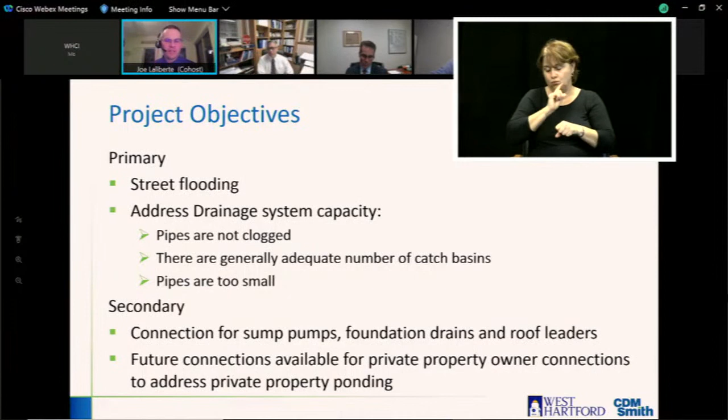Next slide, Cindy. So stormwater flooding, what is causing it? Well, West Hartford is an urbanized area with high impervious area. So let's break that down a little bit. Urbanized area means that there are a lot of houses. It's very well developed. When West Hartford first started, it wasn't as developed. There were fewer houses, and as West Hartford grew to the size it is today, more houses filled in the area, and as a result, it created more impervious area.

So what is impervious area? Impervious area is where water that falls from the sky cannot permeate into the ground. So surfaces like pavement, the streets, your roof, your driveway, things like that are called impervious area. When there's a high amount of it, there's nowhere for the water to be able to percolate into the ground in areas such as grass. So because of this highly urbanized and highly impervious area, it creates more stormwater.

We also have had more frequent and high intensity rain events. I don't think I need to explain any of that to anybody on the call. In the last 4 months, we've had 4 major storms, one of which was over a 200-year storm. The definition of a 200-year storm is a storm that is supposed to only occur once every 200 years. Unfortunately, these storms have been happening at a more frequent pace lately. And so that's another reason causing this stormwater flooding.

Another reason is high groundwater. The town is generally in an area with high groundwater. Trout Brook runs right through much of the drainage area that we studied, and all of the homes around the area have high groundwater. So even in the areas where you do have grass and the water could permeate into the ground, because the groundwater is so high, there's nowhere for it to go. And lastly, we have poor draining soils, a lot of clays and things like that, which don't allow the stormwater to percolate down into the ground.

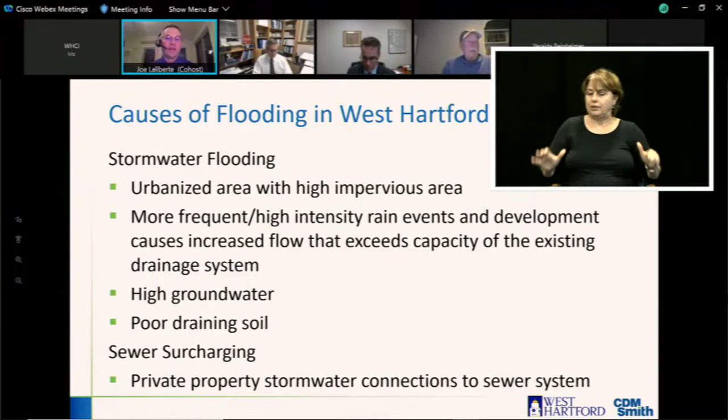And so the sewer system was sized to convey your sanitary sewer and not these private inflow connections. As a result, they overwhelm the sewer system and cause it to surcharge, which is a separate type of flooding, typically what you would see as the flooding in your basement. Next slide, Cindy.

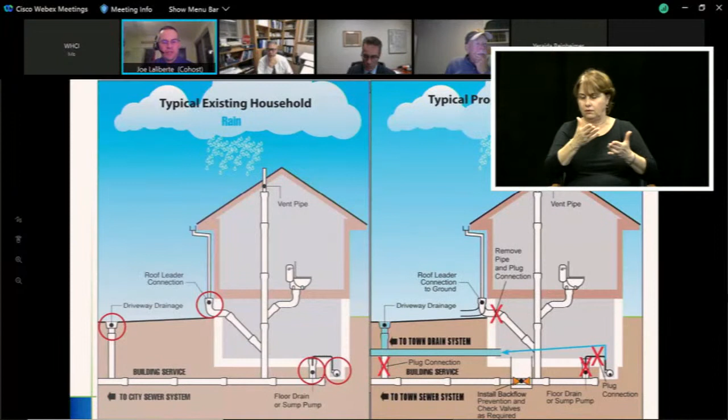So this schematic gives you an idea of a typical household. On the left-hand side, you have what typically would go into a sanitary sewer service: your toilet, your shower, your sink, the dishwasher, the washing machine. All of those things belong in the sanitary sewer service. But what also is in many of the homes in West Hartford is there are roof leaders that are connected over to the sanitary sewer.

There are sump pumps and foundation drains, which is in the bottom right corner, also connected to the sanitary sewer. Unfortunately, when these houses were built back in, say, the early 1900s to the mid 1900s, it was common for the houses to be built that way. So that's how many of them were done. But nowadays, we realize that these connections should have been in the drain and not the sewer system.

The reason they were put in the sewer system at the time is because they can flow by gravity. The sewer pipe in the street is deeper than the drainage pipe in the street. Typically, sewer pipes are 8 to 12 feet deep in the street, whereas the drainage pipes are usually only, say, 3 to 5 feet deep. So if you have a foundation drain underneath your basement that's collecting that high groundwater, it would flow by gravity to the sewer, but would not be able to flow by gravity to the drainage system.

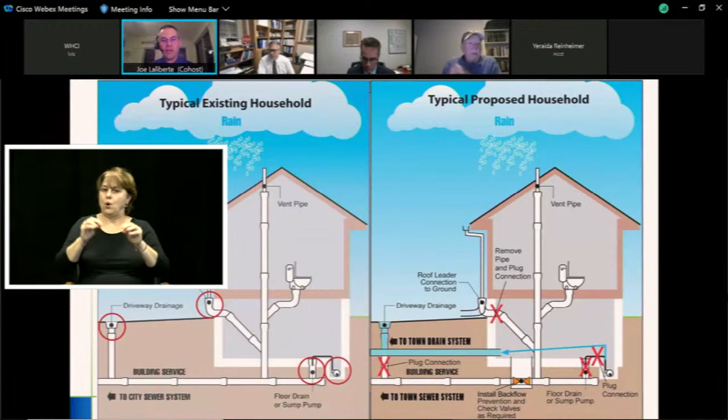So often what you would need to do is put in a sump pump that would pump the groundwater up to the higher elevation where the drainage system is, which is the graphic shown on the right-hand side. So what we're talking about moving forward is to keep the sanitary sewer in the sanitary sewer and remove these private inflow connections, the roof leaders, the foundation drains, and the sump pumps, and connect them over to a properly sized drainage system that would be increased in capacity to take this additional flow, with service laterals at the property line.

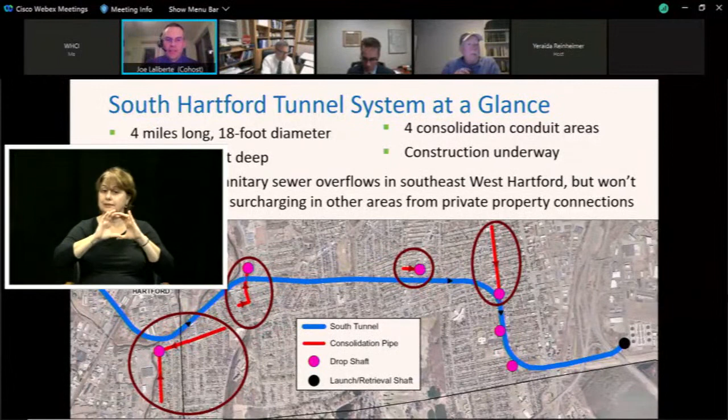Next thing I wanted to do was give you a quick overview of the fascinating South Hartford Tunnel project. The South Hartford Tunnel is a drainage and combined sewer tunnel that runs, on the right side of the graphic, along the east and southeast side of Hartford. The black circle is located at the Hartford wastewater treatment plant. The blue line that goes from the right side of the graphic over to the left side is the South Hartford Conveyance and Storage Tunnel.

That tunnel is 18 feet in diameter, and it's 175 to 250 feet below the ground. We have been working on that tunnel for a couple years now. We started on the far right-hand side of this graphic. We've crossed the West Hartford line, which is on the left side of this graphic. We have about 2,000 feet left to go before we hit the black circle, which is where we come out. We think that we will get there by the end of next month. That's where we're hopeful.

However, this project has a lot of other things that need to happen in order for it to be active. The circled area is all of the consolidation pipes that take flow from West Hartford and bring it to the tunnel. And the pink circles that you see are called drop shafts. That's where the flow from the surface would drop down 200 feet and connect over to the tunnel. Construction is underway on all of these projects, but it's probably another couple years away.

One of the questions that we have gotten is, will that tunnel address all of the sewer surcharging that's happening in my property, say in the center of town, which is where our study area was? The tunnel was sized to take the surcharging down in the southeast corner of West Hartford, where there are actual outfall pipes that discharge combined sanitary sewer flow and stormwater flow to receiving water bodies. So we're looking to connect those up.

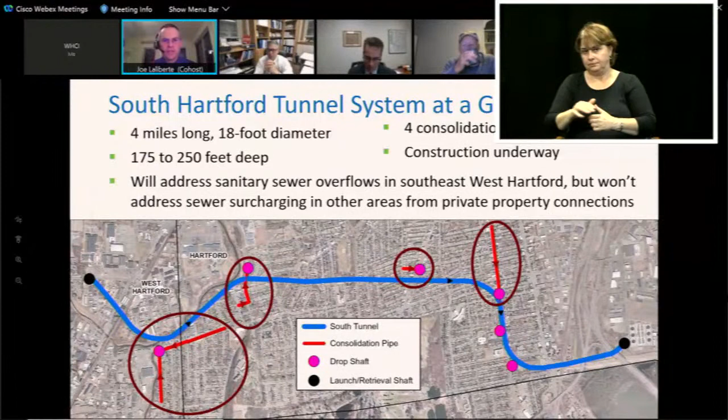So just quick project timeline. 3 studies were mentioned to you. So the first one was done by another consultant engineering firm. It was completed in 2018. And that study was to look at the drainage culverts on Trout Brook. So there are drainage culverts along Trout Brook that are undersized that are causing some flooding associated with them along Trout Brook. And so that study made recommendations, and there are recommendations in the report to upsize those culverts, which you'll hear more about from Cindy a little bit later.

The second study was from CDM Smith, the phase 1 drainage area. And I have a map on the next slide that will show you where the phase 1 versus phase 2 is. But that drainage study was completed by CDM Smith in June of 2020. It was presented to the town council in October of 2020. We had public information meetings November 23rd and 30th for the two different areas within the study area. We did submit a grant application in January of 2021, and as Mr. Martin has mentioned, MDC coordination has been ongoing.

The third study, the second one completed by CDM Smith, is the one that you will hear the most about tonight, which is the phase 2 drainage study. We just completed this study in August of 2021. Last month, we presented it to the town council. We're here tonight for the public information meeting, and again, the coordination is ongoing. So this is the project that Cindy is going to spend the most time talking about.

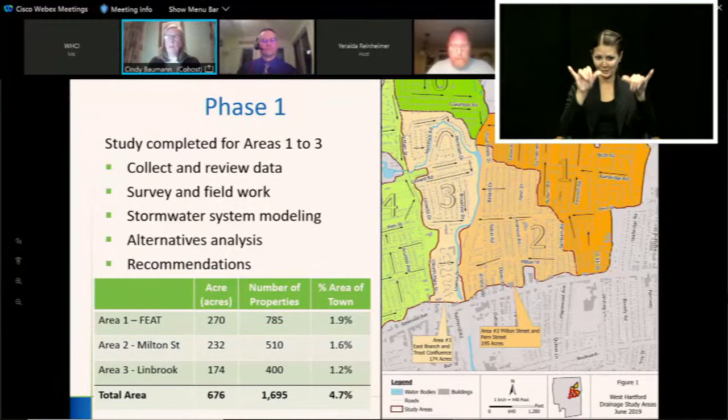This just gives you an overview. For Phase 1, we collected and reviewed data. We surveyed the area and performed quite a bit of field work to get a better understanding of the drainage system. We modeled the stormwater systems within all three areas, came up with alternatives, and then came up with recommendations for those systems that were deficient.

The same scope was done in Phase 2 as well. We went out, collected data, surveyed, got a good understanding of the drainage system, modeled it, and came up with recommendations. Phase 2 included Areas 4, 5, and 6.

Area 4 is just to the southwest, adjacent to Area 3. Area 5 is up on St. Joseph's tributary. Area 6 is around the UConn campus. I'm going to go into a little more detail on those areas.

Area 4 is on the left side, and the flow there flows in a northeasterly direction. It starts up near Brace Road and Arlington. The stormwater system goes down Brunswick and down Arundel Avenue, all flowing in a northerly direction. Then it goes to Fern Street, traverses cross-country to Hilltop Drive, and then cross-country underneath the American School for the Deaf, still flowing north towards its outlet at Trout Brook and North Main Street at Linbrook.

There's a second system that flows from the north in a southerly direction. The main trunk line is down North Main Street, flowing south towards Trout Brook, to pretty much the same location where it intersects North Main Street with Linbrook Road. So that's Area 4.

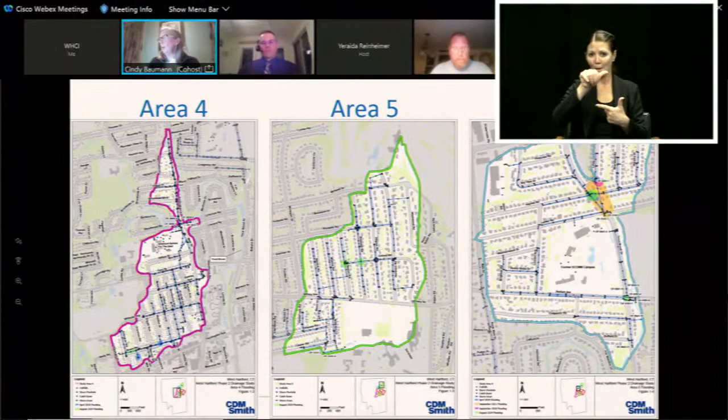This area 6 is the one that also included the Malone and MacBroom study, which included the culverts for Trout Brook: the culverts at Albany Ave, and the one at Lindy Lane. There's a large culvert that goes under Haynes and Lawler, and a smaller culvert on the UConn campus property. The final culvert is down at Trout Brook Drive near Asylum Ave.

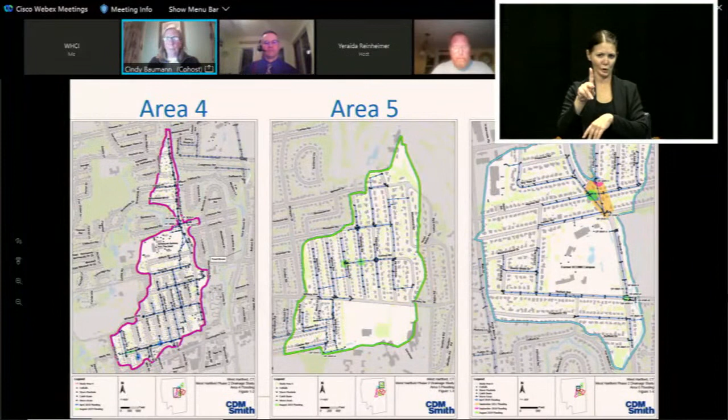So now I'm going to focus on the phase 2 existing conditions. I've selected just a few locations to give you an overview. I'm not going to go over all of the drainage systems, but what we did do is develop a drainage model, a computer model to simulate storms running through the existing drainage system.

We modeled the 10-year storm, as well as quite a few historical storm events, the 2018 and 2019 storms. The 10-year storm is actually a storm that has a 10% occurrence in any given year. So after we ran all the existing conditions, the existing systems, we compared the model results with flow metering data.

And also reported flooding locations, because during those storm events in 2018 and 2019, the town actually documented locations of flooding within all 3 of the study areas. So this on the right just shows you area 6.

It shows you the drainage systems, the pipes in yellow, and the junctions or manholes in green, and then the outfalls. This is the one that has 10 different outfalls that discharge to Trout Brook. Those are the red triangles.

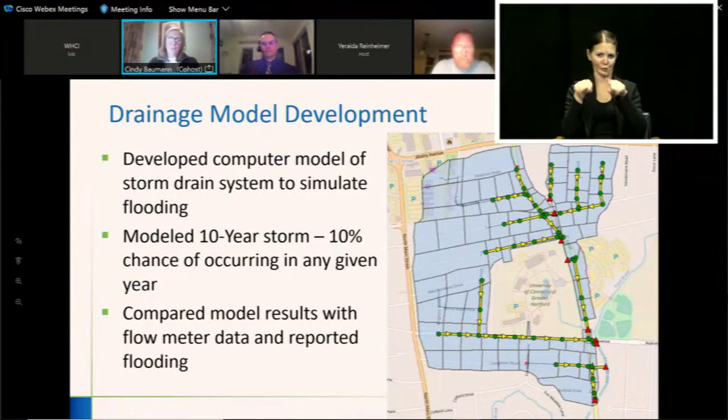So for each of the areas, I picked one system that I will take a look at and give you some results. Area 4, to give you an overview, is 249 acres and has 4 drainage systems. There's the North Main Street system, which runs down North Main Street from north to south, and discharges to Trout Brook at North Main Street and Linbrook Road.

Then there's the Linbrook Road system, a little tiny system that only includes 4 catch basins and 3 pipes, so a real small system there. And then there's the North Main Street South, another smaller system that runs in a northerly direction on North Main Street. Then the large system is the Arundel Avenue system.

And the Arundel Avenue system is the one I explained that runs from Brace Road, then goes down Arundel Ave and under the School for the Deaf, and discharges to Trout Brook.

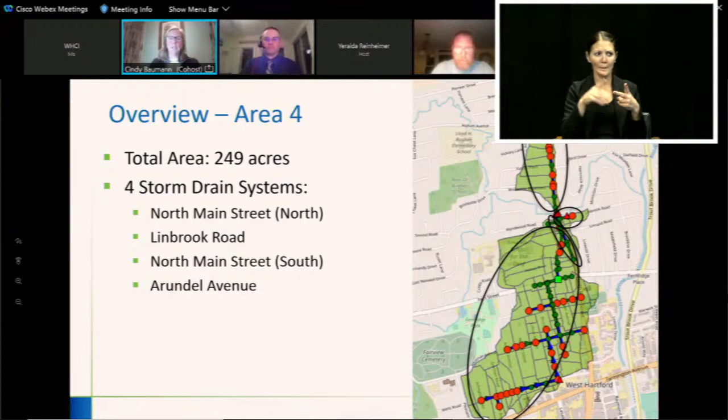In this model representation, you can see that any of the red nodes are nodes that experience flooding, and any of the blue pipes are pipes that experience flooding. So you can see in this model there's quite a few locations where there's either red dots or blue pipes, showing that the existing drainage system does not have sufficient capacity.

So the existing conditions were run, and the locations where there was significant flooding were at Brace Road, Brunswick Ave, Whitman and Keeney Avenues, and also North Main Street near Trout Brook.

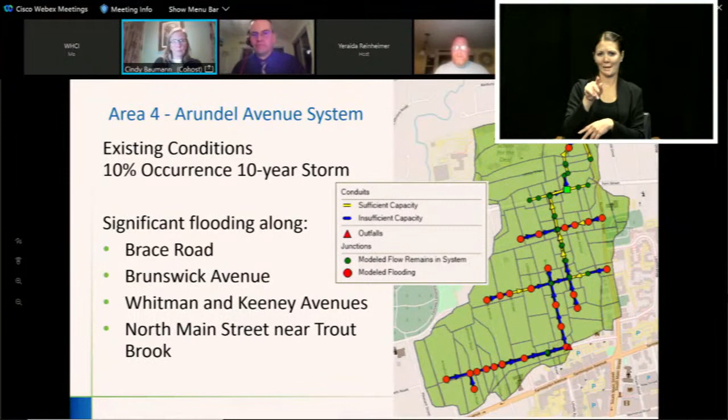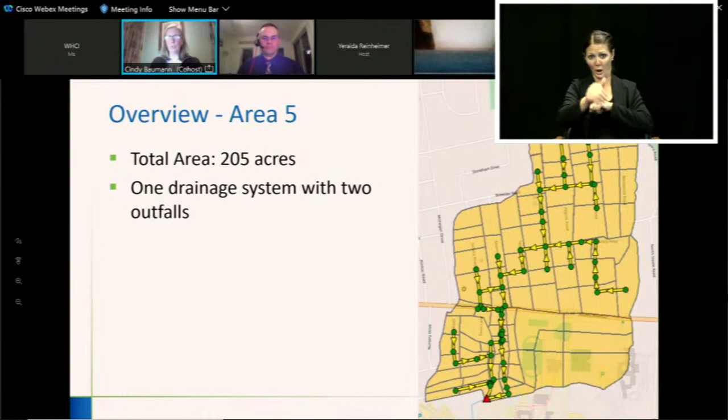So now area 5, this is a large area, 205 acres, and it has 1 drainage system. That drainage system starts up at Mohawk Drive, and as described earlier, runs down across Albany Ave and down Wiltshire to their discharges. There's 2 pipes that discharge near Lawler and Wiltshire.

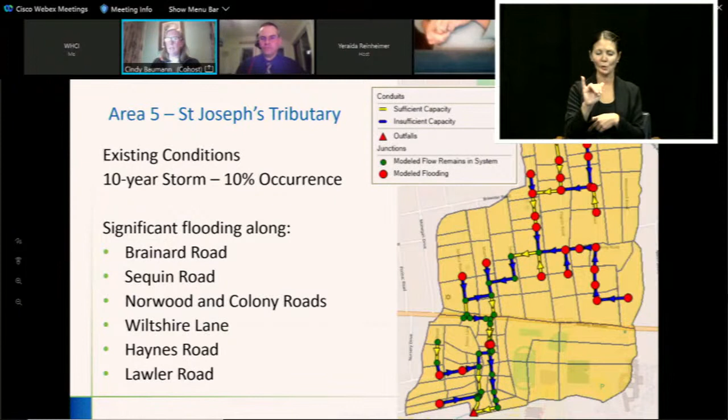This system has significant flooding along Brainard Road, Sequin Road, Norwood and Colony roads, and the Norwood and Colony locations actually coincide with the documented flooding we received from the town in previous storm events. There's also insufficient capacity documented in the model on Wiltshire, and Haynes and Lawler as well. Once again, the same thing applies: if it's a red node, it has insufficient capacity, as well as a blue pipe.

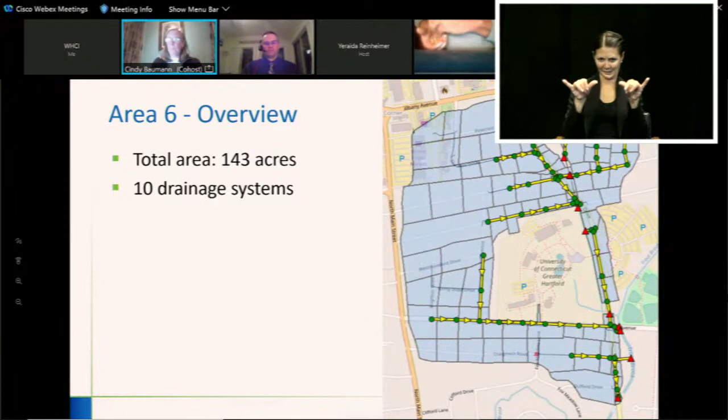And then for area 6, it's a total of 143 acres, and there's 10 drainage systems in this area. The smaller systems in this area, some of them do have flooding, both documented and modeled, and there's like 1 or 2 that do not. But the significant flooding occurs along Craigmoor, Asylum, Trout Brook Drive, Lawler, Haynes, and Lindy Lane.

And this is all just the drainage system. The flooding that occurs at Lindy Lane, Lawler, and Haynes under the Trout Brook Drive culvert study is part of the Malone and MacBroom study.

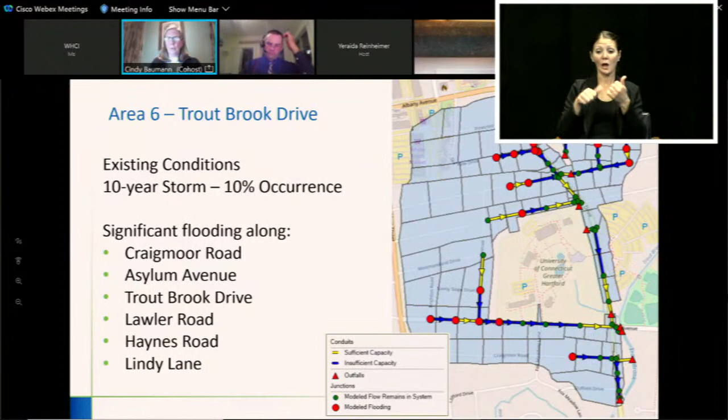What I have next is just for area 4, 5, and 6. This is the phase 2 study. We actually have each of the outfalls and the drainage systems listed, and we've documented whether the existing systems have capacity during that 10-year design storm, and then the historical storms that we looked at.

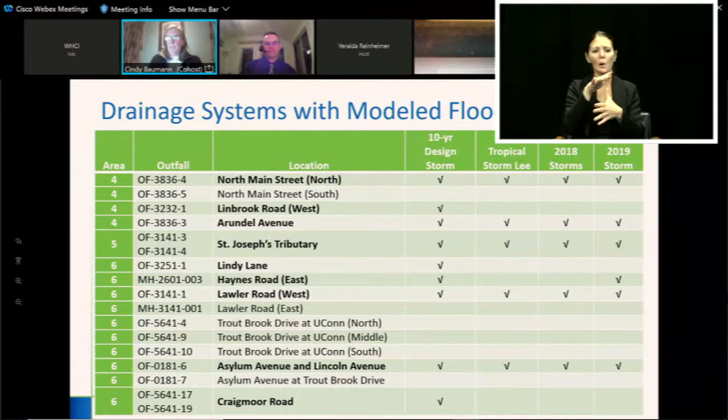So we use these model results to prioritize the various drainage systems within areas 4, 5, and 6.

Now I'm going to tell you a little bit about the private inflow removal. I know Joe had mentioned a little bit about this earlier. As part of this study, we looked at all of areas 4, 5, and 6 with respect to the information that MDC had already conducted regarding which houses have private inflow that needs to be removed from the sewer system and put in the drainage system.

With this study, for areas 4 and 5 there are some areas that MDC did not perform building inspections on and did not yet have recommendations for. So what we did is take the averages for other areas within West Hartford and use an approximation for the number of buildings that would require inflow removal. There could be additional properties that have not been inspected and/or not been identified at this time.

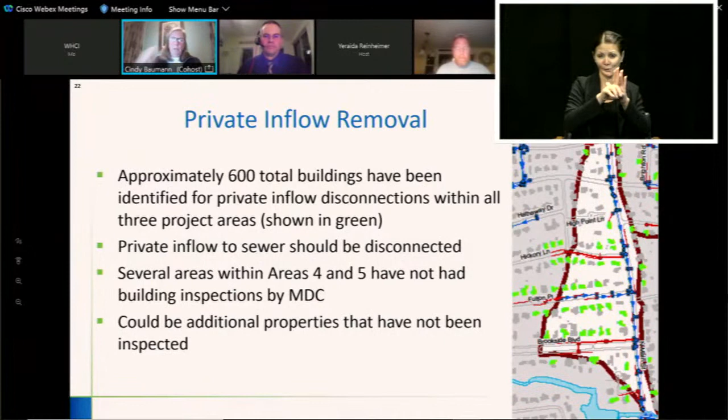With the private inflow, what we have designed and included in our recommendations are collector drainage systems, which include drain extensions and collector drains. Here's an example of a location where it's already been done, over in the Greenhurst Road area. The red solid lines are drain extensions, and the dashed lines are collector drains.

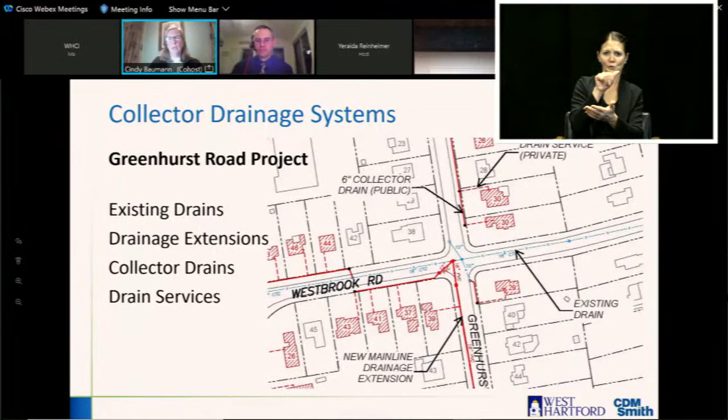In all areas 4, 5, and 6, we designed drain extensions for those locations where you did not have drainage in front of your house—extending the drainage up towards your property. We also designed collector drains so that from the last manhole or from a catch basin, a collector drain can be installed, giving your house a location to connect your inflow disconnect.

Now I'll go over the recommendations in all 3 areas, 4, 5, and 6. We used the drainage system modeling to come up with these recommendations, and all of them are based on a 10-year design storm—that's a 10% probability of occurrence in any given year.

So for all areas, we developed recommendations to increase the pipe capacity and pipe sizes to carry the 10-year design storm.

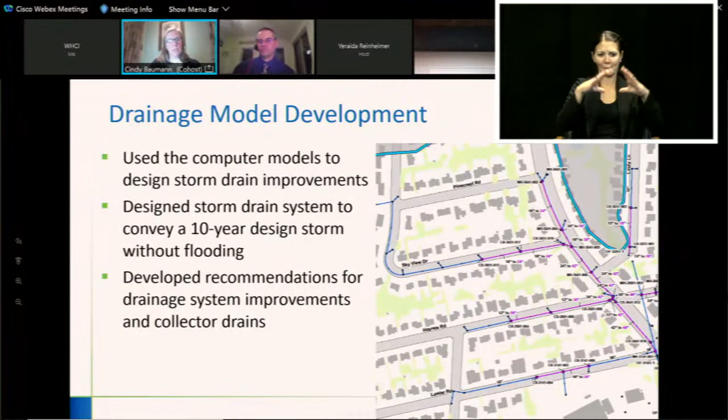So then we actually took all the recommendations and developed a prioritization with 3 tiers. The highest priority are systems with documented flooding that also have insufficient capacity for both the modeled 10-year storm and the historical events - really 4 events, since it's Lee, 2 storms in 2018, and 1 in 2019. If there's documented flooding plus modeled flooding for the 10-year storm and the historical events, that system was given a high priority, or tier 1.

Tier 2 is a moderate priority, where there's modeled flooding during the 10-year storm and the historical events, but we didn't have documented flooding from the information we received from the town. The last tier, tier 3, is where it just had insufficient capacity during the 10-year storm event.

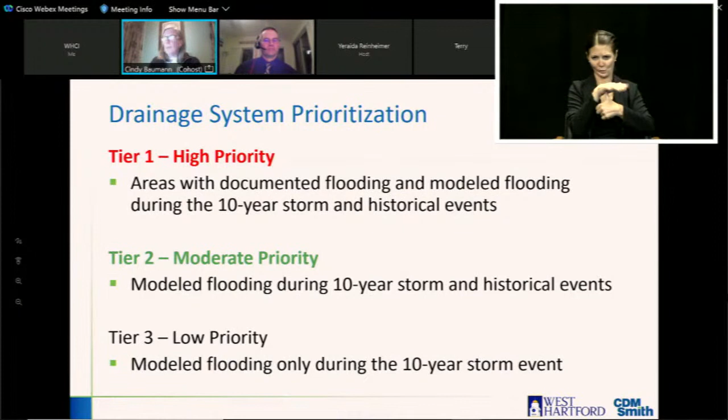All of the systems within areas 4, 5, and 6 were prioritized according to tier 1, tier 2, and tier 3. I'll start with the prioritization done in phase 1, because we've done all the recommendations and prioritizations in phase 1, then in phase 2, and we also took information from the Milone and MacBroom study, so we're prioritizing all of them from all 3 studies. This gives you a summary of the phase 1 prioritizations for areas 4, 5, and 6. It doesn't include all systems, because a few did not have insufficient capacity during the 10-year storm, so they weren't put into tier 1, 2, or 3.

I'm going to go over these 3 tiers - I picked one example from each to give you information on what's being recommended. All 3 examples are tier 1, and they're also in 3 different areas: one in area 4, one in area 5, and one in area 6. I'll start with the one on Lawler Road in area 6.

For Lawler Road, this is the graphic I showed before - the purple pipes are the ones being replaced, and we have existing and proposed pipe sizes shown. We've also summarized them in the table: there's 18-inch pipes, about 200 linear feet proposed, all the way up to a 48-inch pipe with approximately 400 linear feet. So we have a total of 2,500 linear feet of new pipe within area 6, the Lawler Road improvements. We've done this for all of area 6's 10 areas, as well as areas 4 and 5.

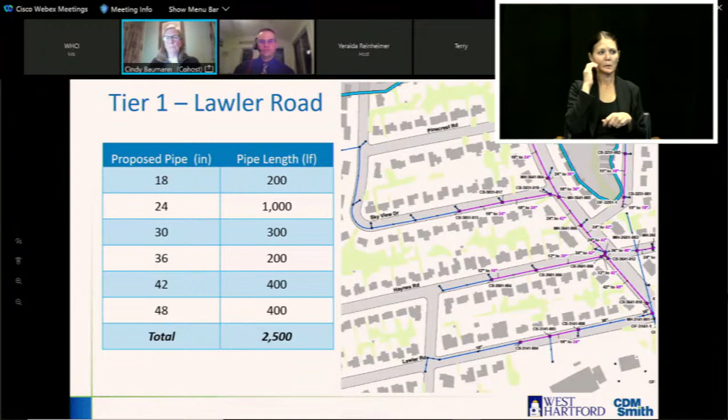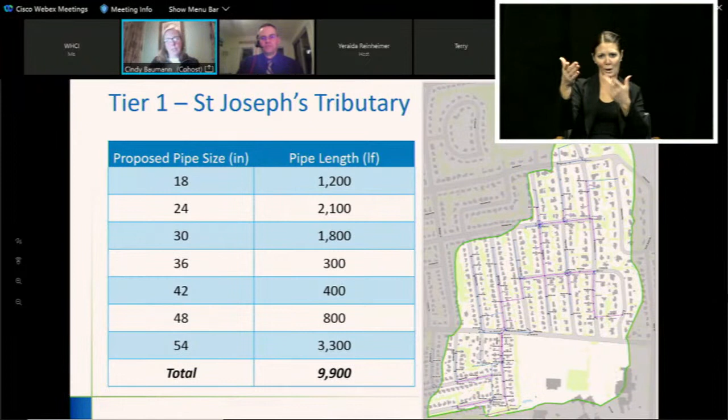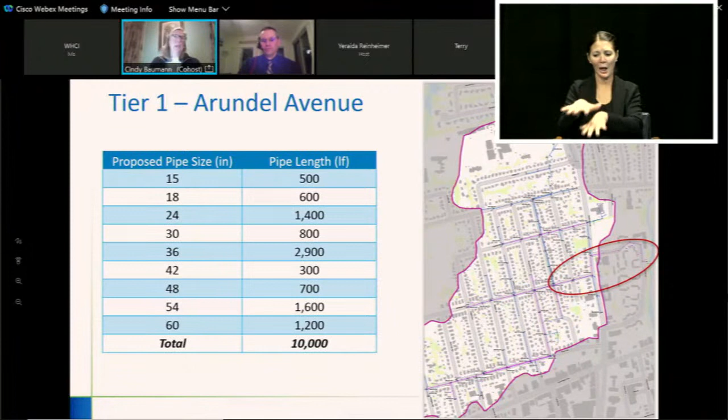We looked at various alternatives in this area because the entire drainage system has insufficient capacity. If we could divert some flow in the area where the red circle is, east down Loomis to an existing outfall on Trout Brook, it would alleviate the downstream system so it wouldn't have to be upsized. We're taking flow coming down Brace Road and from the southwest flowing northeasterly, then diverting it from Arundel Ave down towards North Main Street and down Loomis to the existing outfall on Loomis Drive. So this alternative did include a diversion.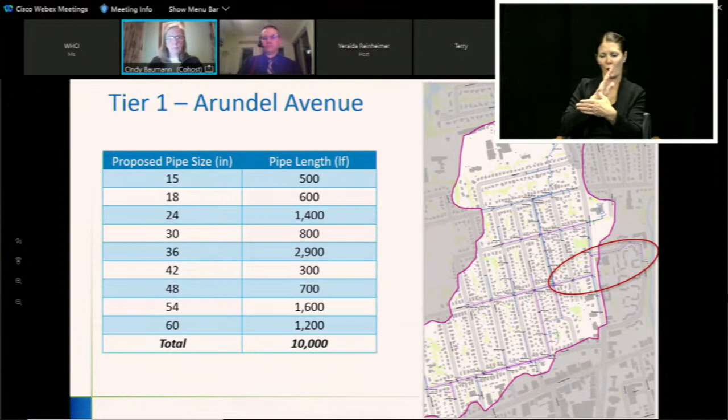The next shows all of the collector drains. So those systems where we were proposing those drain extensions and those collector drains, those costs were all done for areas 1, 2, and 3. And these are the costs for the collector drains and drain extensions.

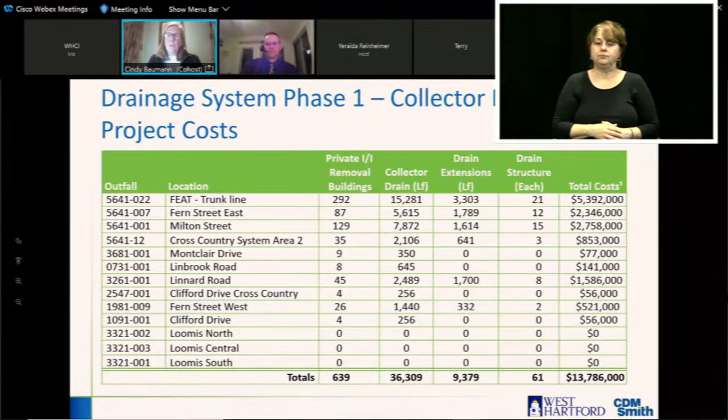And now for areas 4, 5, and 6. So 4, 5, and 6, the recommendations for all the tier 1, 2, and 3. You can see that it's $117 million for all those. And you can see the St. Joseph tributary is a very large improvement, as well as Arundel Ave. And those are the two really large systems that included approximately 10,000 linear feet of new piping.

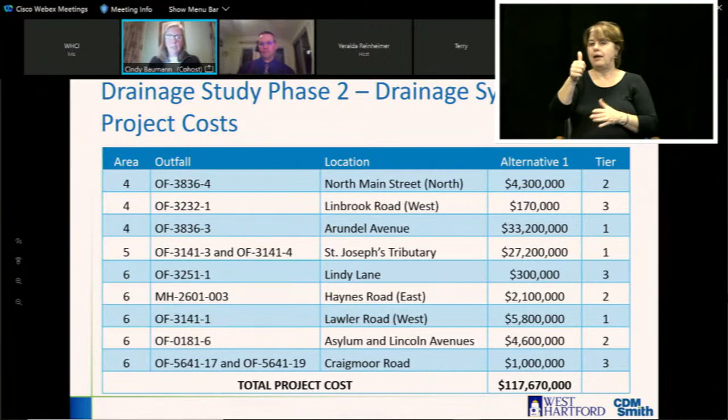And then for the collector drain analysis that we did for areas 4, 5, and 6, there's 15 million in there for all the improvements to get that I&I into a collector drain or a drain extension so it can get to the drainage system.

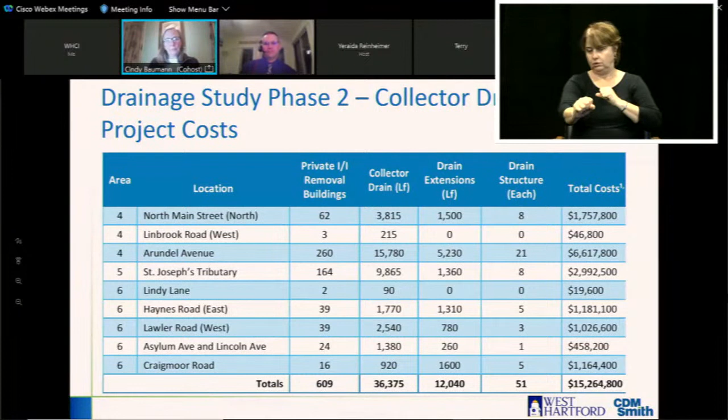So then we did take and put together phase 1, which is areas 1, 2, and 3, and then phase 2, which is areas 4, 5, and 6. And then we also included the Trout Brook study that was done by Milone and MacBroom. So I'm going to give you a little background on that. As we had mentioned earlier, in September of 2018, Milone and MacBroom, who are now SLR, evaluated the culverts along Trout Brook, and they came up with recommendations to upsize those culverts to decrease the flooding limits and alleviate flooding within the area.

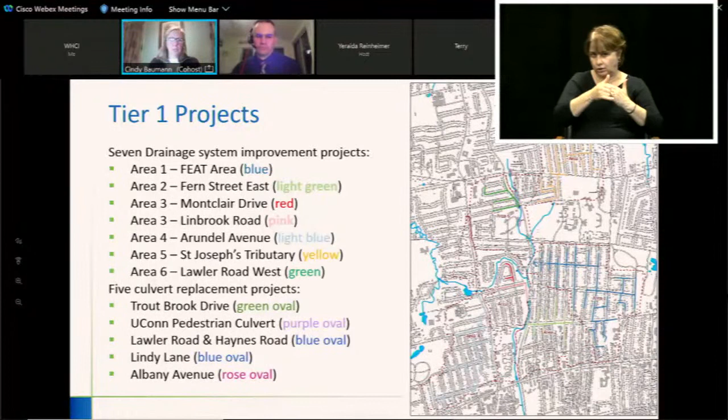So now I'm just going to go over some next steps. We do have this public meeting for areas 4, 5, and 6. And then we have a groundwater study that we're doing in area 3, and we are starting that study. We're going to install some monitoring wells and get a better idea of how the groundwater moves and how levels change within that Linnard and Linbrook area.

And then we are beginning the design of the tier 1 projects in areas 1, 2, 4, 5, and 6. So we have selected the FEAT area in area 1, the Fern Street system in area 2, the Arundel Avenue system in area 4, the St. Joseph Tributary system in area 5, and then Lawler Road West in area 6. We've also started looking at the design for the culvert replacements at Trout Brook Drive, the UConn pedestrian culvert, and also the Lawler Road and Lindy Lane culvert.

And then we are looking at additional grant and funding opportunities as Joe had mentioned, and we are doing our ongoing MDC coordination for house inspection and the collector drains. Now to give you a little bit more on the groundwater study. The groundwater study is starting right now as we speak, and we are looking at this area 3 because of the groundwater problems in the Montclair, Linbrook and Linnard area.

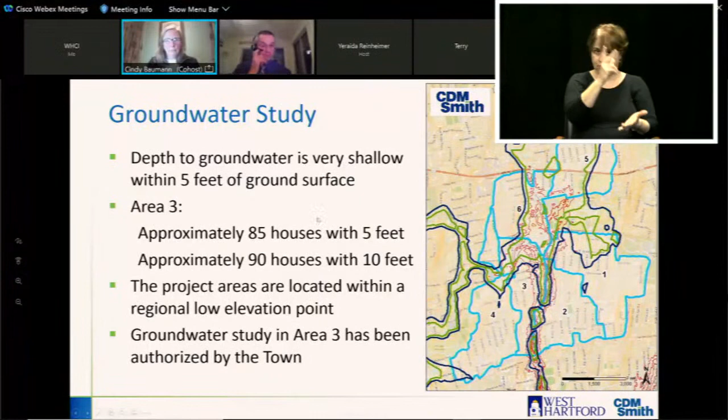So the last thing I'm going to go over is the schedule. The groundwater study that we just started should be finished in the spring of 2022. The initial drainage system design should be finished in the winter of 2022-23. The initial culvert design for 4 of the 5 culverts should be finished in the winter of 2022-2023. And then construction could potentially begin as soon as the spring of 2023.

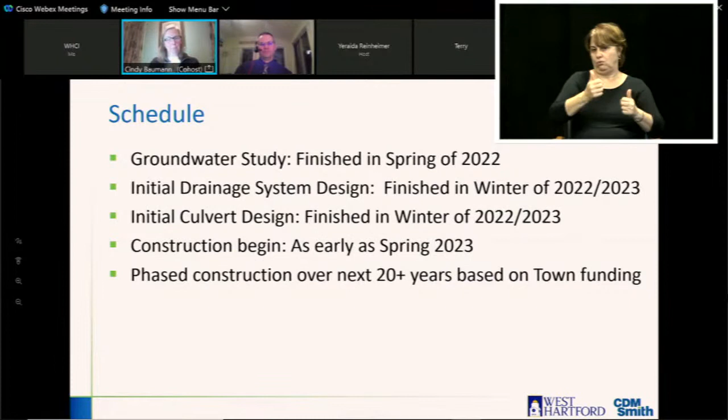For a lot of the improvements, phased construction would occur over the next 20 years, and it is very dependent on town funding. The town funding will guide and dictate what projects will be done at what time. So now I'll open it up for questions.

Thank you so much. I am going to go ahead and unmute Mr. Alderman, who has raised his hand. Thank you. Cindy, it was a great presentation.

I live on Norwood Road, and in the last 25 years, I've noticed that as there have been additions to houses and more impervious use of land on Westwood Road, we're having more and more flooding on houses on Norwood. Looking at the diagram for what currently exists in area 5, it looks like there's only one surface drain on Westwood that connects into what's down on Norwood.

So you've got all of the uphill houses, all the houses on the east side of Westwood, with water going onto Westwood Road. There's virtually nothing on Westwood Road to collect stormwater. And on a lot of those houses, you have uphill properties where the driveway lines up with the property across the street.